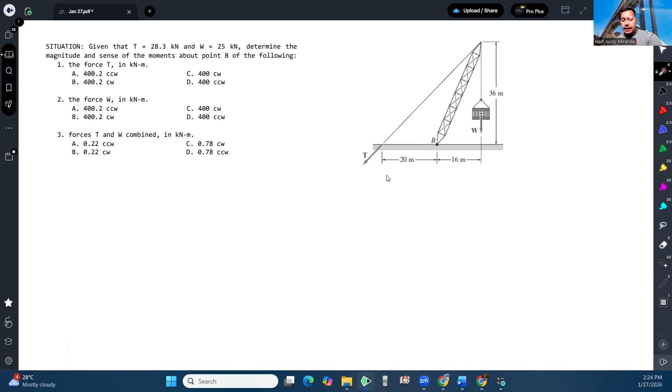The value of the tension is 28.3. Then we are also given W. The value of W is 25. So I'll just place 25 here. And we are asked to find the moment about this point.

Again, recall, when we say moment, that is just force times the moment arm. So let's say our moment arm is Z, which is just the perpendicular distance of the force from the point of rotation.

So first, let's find the moment produced by T. As we can see, this T is inclined, so if we want to get its moment arm, we need to get the perpendicular distance, this distance here.

Which is possible, however, there's an easier way. The easier way is, instead of using the full value of this force, you can always subdivide that into its components.

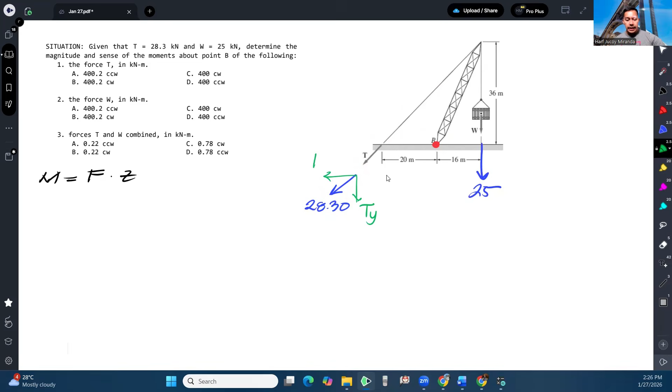So let's call them Ty and Tx. Okay, so now, the advantage is that if you make it a vertical and horizontal component, it will turn out that the moment arm will just be horizontal and vertical as well.

It won't be inclined like this one. Because if the force is inclined, the perpendicular distance will likely be inclined too. But if the force is vertical and horizontal, the moment arm will just be horizontal and vertical.

Okay, so that's what will happen. That's the advantage. Now, the current problem I have is that at this particular location, I don't know the moment arm of Ty, and I don't know the moment arm of Tx.

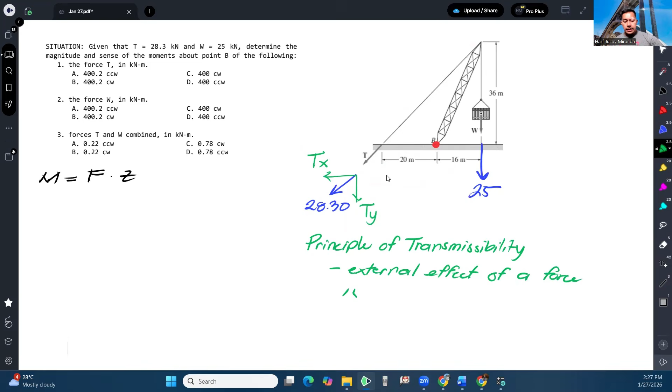the external effect of a force is the same anywhere along its line of action. So in simple terms, since the external effect of a force is the same anywhere along its line of action, that means we can move it.

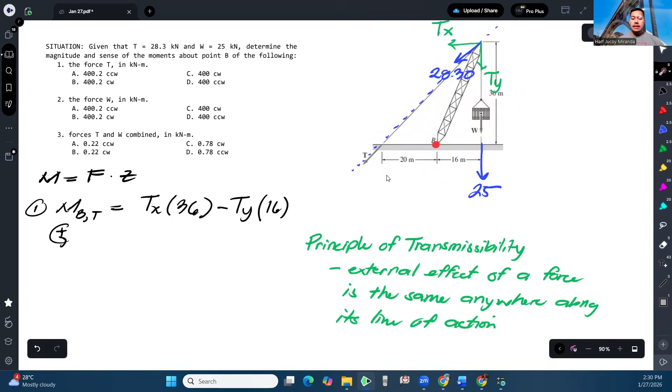Actually, pwede ka rin bumuo ng ganitong right triangle. Kaya lang, ang problema sa ganitong right triangle, wala kang mga sukat. Make sure na meron kang mga sukat. So kaya ito, ibubuo ko, kasi ito, meron akong sukat. Ito, 20 plus 16. Tapos, ito rin, meron akong sukat. That is 36. And with that, I can say that we can utilize this right triangle to define the slope.

Lumalabas ngayon, this is 36, this is 36. So it will turn out that the slope here will just be, di ba 36, 36, ano lang yan? Tawag dito, 45, 45 na right triangle, no? So lumalabas, ano lang to, 1:1, tapos square root of 2. Kasi lalabas dyan, itong buong sukat na to, magiging 36 square root of 2 pag kinompute natin.

So pakita ko lang ha. Pag kinompute natin yung hypotenuse, di ba, square root of 36 squared plus 36 squared. So lalabas lang dyan, 36 square root of 2. Okay, ngayon, kung i-simplify mo into a smaller scale, pwede mo lang i-divide ito tsaka to. Pag dinivide mo yan, edi 36 over 36 square root of 2, lalabas lang 1 is to square root of 2. Pag dinivide mo naman ito dito, ganoon din, 1 is to square root of 2. Kaya ito na yung slope natin.

Ngayon, kung ayaw mo tong gamitin, okay lang. Halimbawa, ayaw mo tong gamitin, ayaw mo nang isipin yung smaller scale, okay lang din. You can actually adapt this, and this as our slope already.

Okay, so it will turn out, guys, that our Tx, dito ko nalagay sa gilid, is equal to T, ano nga ulit yung T? 28.3. Okay, 28.3 times 1 over square root of 2. Tapos yung Ty natin, ganun din, 28.3 times 1 over square root of 2. So pwede nyo kumpitin yan or kahit wag na, idiretso na natin dito.

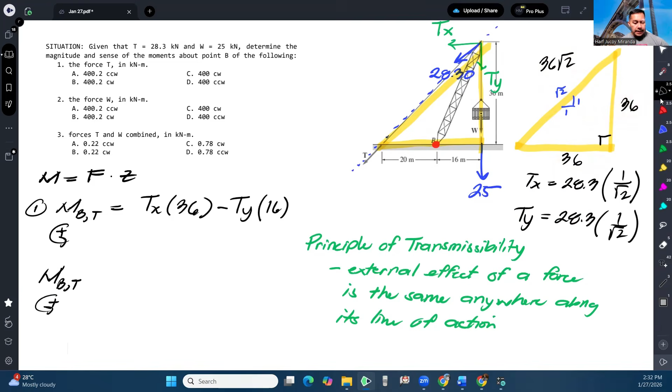So we will have moment at B due to tension T, assuming counterclockwise positive, we have 28.3 times 1 over square root of 2 times 36 minus 28.3, ito na sa baba ilagay, minus 28.3 times 1 over square root of 2 times 16. Okay? So if we would be calculating that,

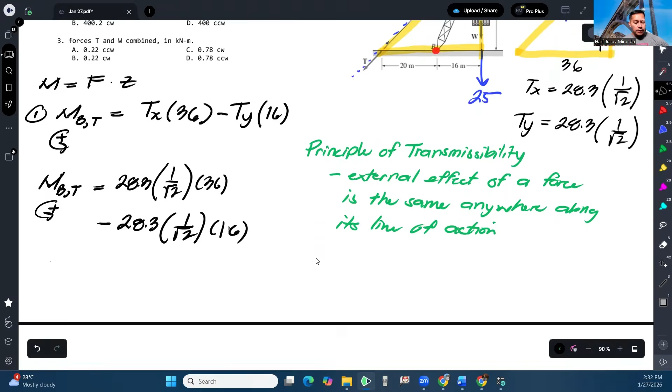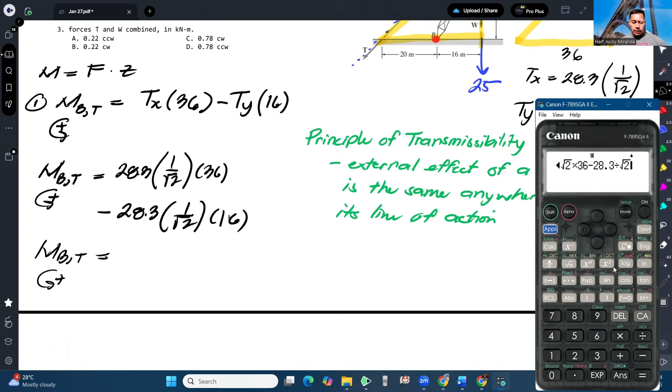We will have 28.3 over square root of 2 na lang times 36 minus 28.3 over square root of 2 times 16. So that will give us 400.22 kilonewton-meters.

Okay, ngayon, pansinin nyo rin na ang lumabas na sagot ay positive. So ibig sabihin, ang final rotation nito is positive, which means counterclockwise. So ibig sabihin, ito ay counterclockwise. And that would be our answer.

So again ha, balik lang ako dito sa pagkuha ng component. Kung sakali lang na ayaw nyong gamitin to, kasi para sa, ito kasi madali lang dahil same ito. Pero pag nag-iba, medyo mag-iiba rin syempre yung slope dito. Kung ayaw nyong gamitin yan, okay lang. Parehas lang yan dito sa buong triangle na to.

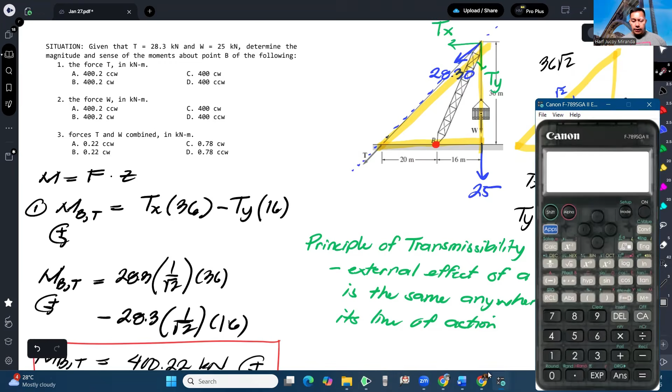For example, if you want to calculate for Tx, instead of writing here 1 over square root of 2, you can write 36, no? Kasi 36 to over 36 square root of 2. Okay? And ganun din sa Ty, you can write here 36 kasi 36 ito over 36 square root of 2. And if you would calculate that here, bali ang mangyayari lang, ito times 36 over 36 square root of 2. Tapos, ito times 36 over 36 square root of 2.

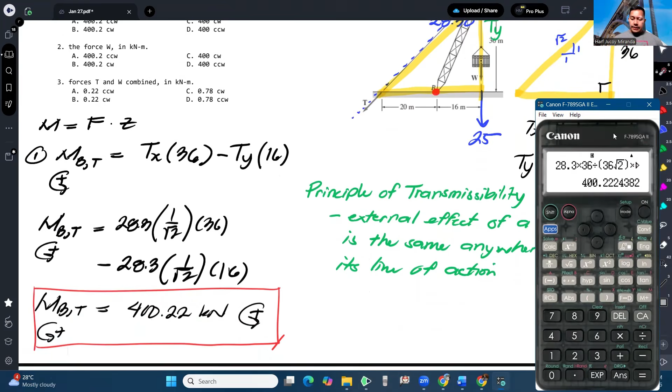Ayan. Okay? And pag kinindot mo, same answer. Okay? So, that's another way, no? If you do not want to simplify it.

Okay? Now, actually, yung ginawa kong una, medyo meron pang mas mabilis na paraan para makuha yung moment sa B dahil do sa tension. So, remember, sinabi natin to, principle of transmissibility. So, actually, pwede pa natin i-further utilize yan para mas mapadali pa yung solution. So, alternatively, pwede mo rin ilagay itong force na to.

And pwede mo rin siya ilipat actually dito. No? Burahin ko na lang to. Pwede na siya ilipat dito.

Okay, so ano namang advantage kung siya natin siya ililipat? Okay? So, anong advantage? So, kapag siya natin siya nilipat, ang mangyayari, pag nag-moment ka sa B, so, ang unang tanong talaga dito ay, wala bang pinagkaiba yun, sir? Kumbaga, nandito siya kanina, ito yung nakuha natin ng moment. Ngayon, sabi kasi dito, pwede mo daw ilipat. Di ba? At ano daw ang mangyari pag nilipat mo siya anywhere along its line of action?

Yung external effect niya ay same lang. So, yung external effect na yun would mean yung moment dito. Okay, so dapat same lang. So ngayon, bakit ko siya napili dyan ilagay?

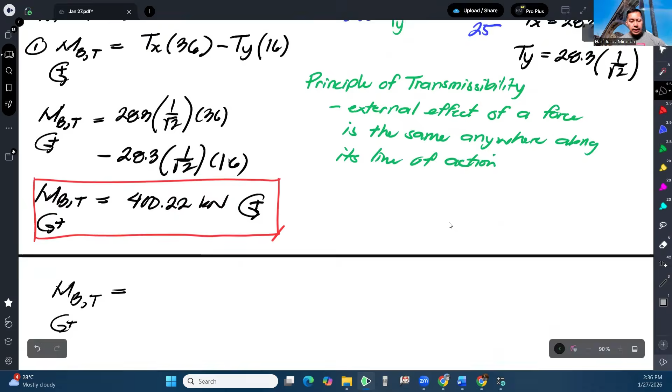So alternatively, for number 1, you can also find the moment at B, assuming counterclockwise positive, by using Ty times 20. And that's it, no? Kasi yung Tx mo nga, ang moment arm ay 0. Okay? At ang rotation nitong Ty this time ay counterclockwise.

Tingnan natin, ano? So kapag kinompute natin yan, we will have 28.3 times 1 over square root of 2 times 20. And that gives us supposedly same answer. Ayan. And that gives us 400.22 as well. Okay? So, ang nga pala, kilonewton meter ito kasi moment. Ayan. Okay? So, we will get the same answer.

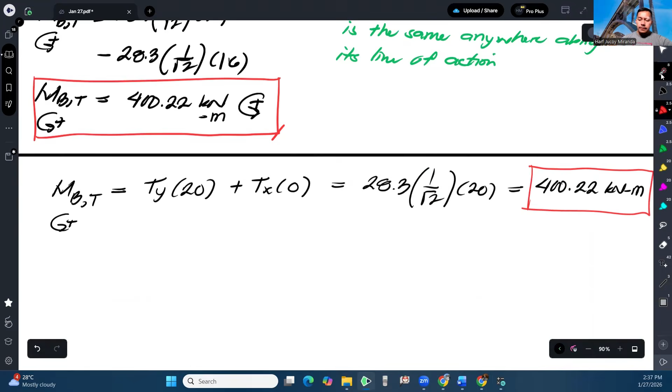Okay? So, actually, dito, ang pinakamadali talaga is pag nilipat mo siya, kung saan yung isang component mag-zero kasi dadaan doon sa point of rotation. Okay? So, that's it. So, ibig sabihin, ang rotation natin ay counterclockwise. So, our answer here would be 400.2 counterclockwise.

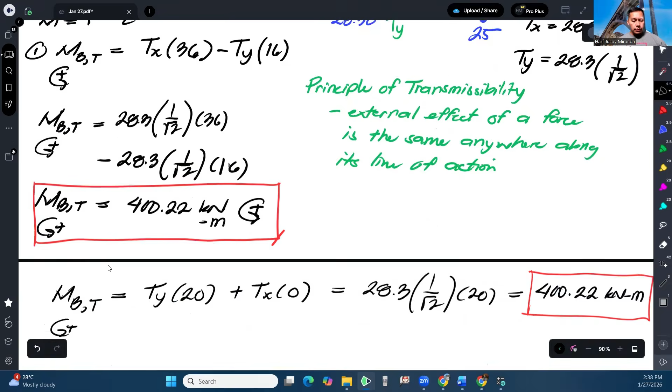Next, find the moment of force W naman. So, yung force W na to, ito madali lang kasi vertical lang siya. So, madaling makita na from point B, ang moment arm natin ay 16. So, for number 2, yung moment sa B, dahil do sa W is just, assuming counterclockwise positive tayo, okay, so we have, ang magnitude ay 25 at ang moment arm ay 16.

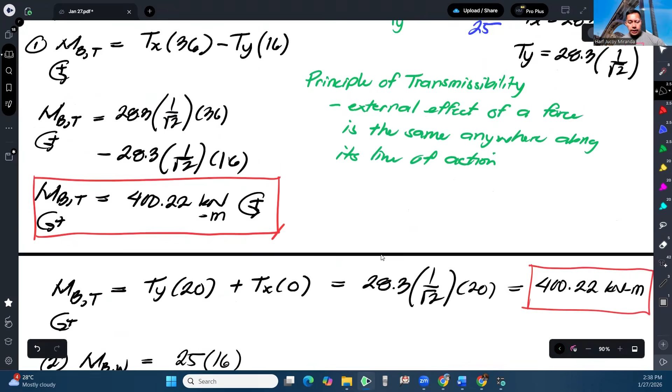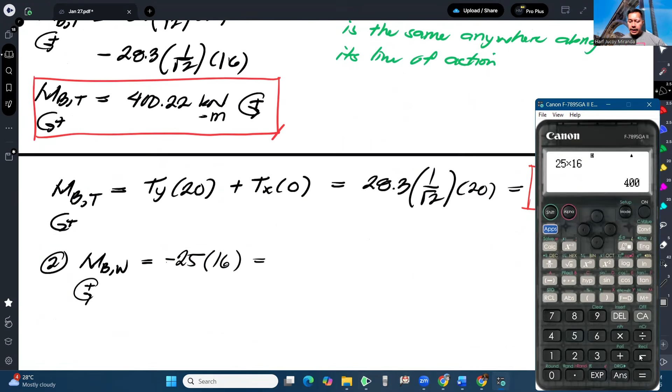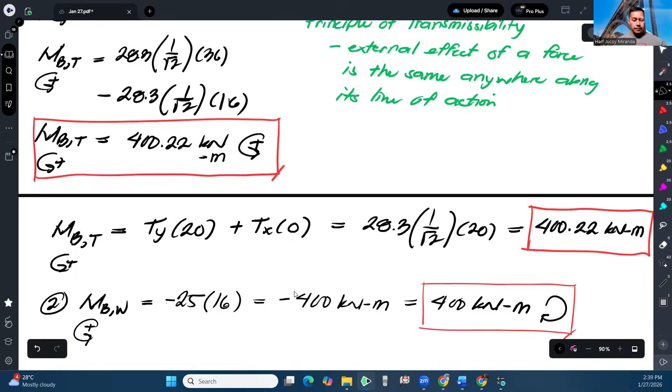At ang rotation nila about B ay clockwise, so negative. Okay, and that's it. So we have 25 times 16. I believe that's 400. Okay, 400 kilonewton. So negative 400 kilonewton meter, which means 400 kilonewton meter, di ba ang assumption natin, counterclockwise is positive. Ang nangyari kasi nag-negative. So, ibig sabihin, ito ay clockwise. Okay? So, that would be our answer. So, that is letter C.

And lastly, forces T and W combines. Ito, kung i-combine na natin, basically, ang mangyayari lang, kung ano yung moment natin dito sa T at yung moment ng W, i-add lang natin. Pero take note, ang naging resulting moment ng T ay counterclockwise. Ang naging resulting moment ni W ay clockwise. So magkabaliktad ulit sila ng sign. Okay? And because of that, we will consider that once again.

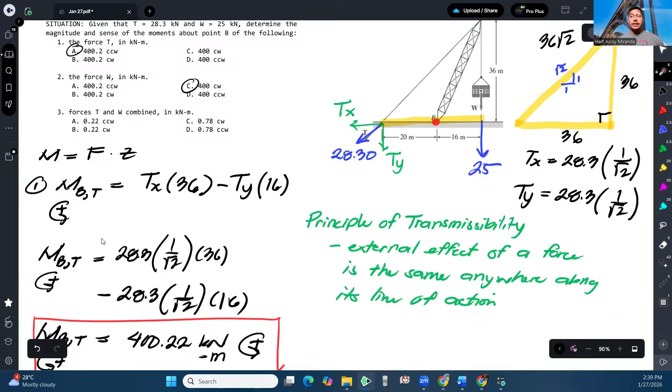So for number 3, so moment at B combine na would be, so assuming counterclockwise positive. So dahil ito ay naging counterclockwise, no? So 400.22. Tapos yung moment ng W is clockwise, so negative. Okay, and that gives us 0.22 kilonewton meter.

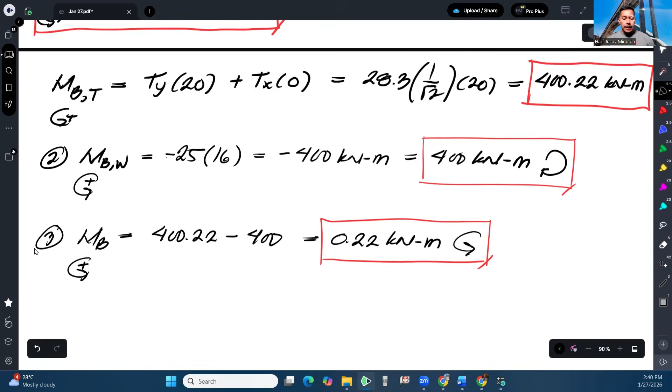And ang resulting sign dito is positive, so therefore, ito ay counterclockwise. Okay? And that would be our answers. So sa number 3, that would be 0.22 counterclockwise. And that's how we solve this problem.